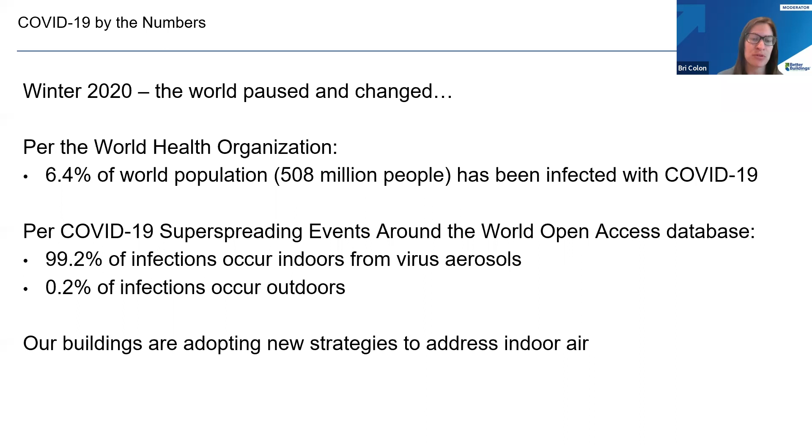Because of the changing landscape over the past couple of years and focus on indoor air quality, there have been a variety of initiatives catalyzed, as well as pieces of legislation. I wanted to share some information here to start that's connected to that.

First off, there has been a piece of legislation, the Bipartisan Infrastructure Law. There's a provision within that applies to the theme of today's webinar, focusing on energy improvement in public school facilities, honing in specifically on the K through 12 environment. It allows for new competitive grants for energy efficiency improvements and renewable energy improvements at public school facilities.

These could entail repairs and renovations that reduce energy costs or lead to improved teacher and student health and achieve energy savings. Eligible entities for these grants can consist of a consortia of one local education agency and one or more schools, nonprofits, for-profits, or community partners.

Applicants will be prioritized for schools with improvement funding needs, those with high free and reduced price lunch percentage, or those situated in rural locales. The funding will amount to $500 million, spread across 5 years at $100 million each. It's overall an interagency collaboration in enacting this provision.

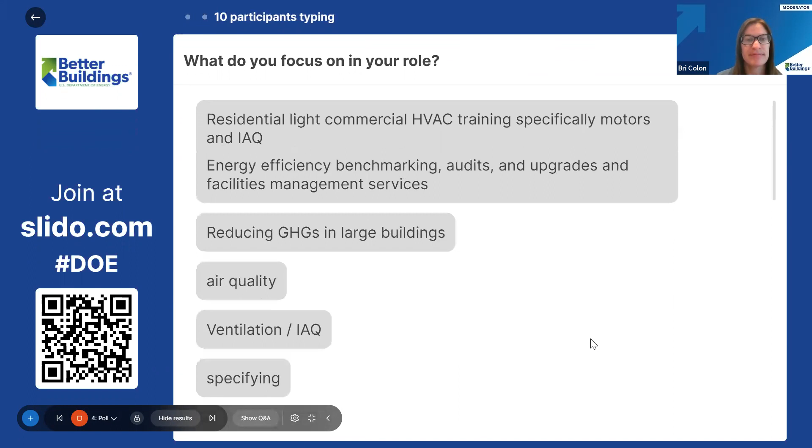And now we're curious where folks focus in their roles. Really the thought behind this question is, do you specialize in indoor air quality in this theme? Or are you working in facilities, but indoor air quality is just one aspect of that role? Where are your primary focuses coming in, and kind of where you see indoor air quality? Okay, seeing some items roll in here. Or are you a teacher and you're concerned about the health and well-being of students, faculty, and staff? I'm curious where those focuses are. Okay, we see some specializations on indoor air quality in communities, public buildings, energy efficiency at large. And for some folks, it's just one aspect of the role for designing and planning. Great. Health and well-being overall of students and staff. Perfect. Thank you so much for folks engaging in this. This is great to know this background information.

All right, feel free to continue entering in options. We have just a couple more questions, we can go to the next one. For folks who are affiliated with a school, this could be university, K through 12, or a district. If your school or district is planning or have completed any indoor air quality upgrades, we'd love to know a little bit more background and details about that. If you have completed those upgrades and are planning more, or other, or if currently folks are in the planning process for indoor air quality upgrades, as well as if folks haven't planned or completed yet any indoor air quality upgrades and they're here to learn some more information potentially before doing so.

Okay, I'm seeing a majority have completed some upgrades at this point and are planning for more. We'll let those roll in here a little longer. Feel free to continue entering in responses.

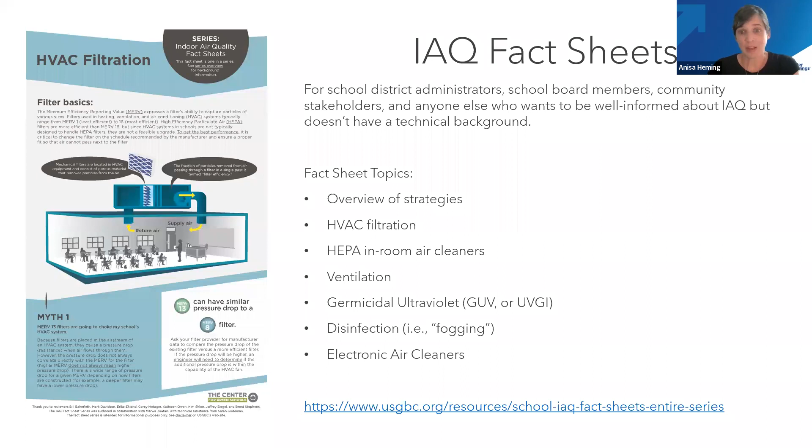So you can go to the next slide—I'll walk through the pieces and parts of these. They have a pretty consistent structure so you can understand what's there and use them if you'd like, and again, these are all free. This one is on ventilation. The first section is just the basics: what is mechanical versus natural ventilation, and what do we mean by ventilation.

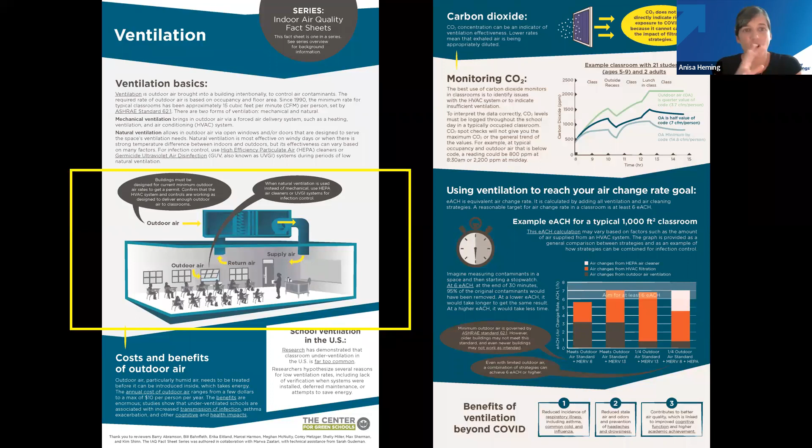The second section is a visual of how air moves through space. This is a consistent visual of a classroom on all the fact sheets that shows how the technology, whatever it is, actually works in the space. Then the next section is usually cost and benefits, or a more detailed look at the data and guidance out there about the technology.

On the second page, there's a section that goes one level into the technical information about how the technology works. For ventilation, we're talking about why measuring carbon dioxide only tells you part of the story related to indoor air quality, and what it can tell you—so monitoring CO2, what it reveals about what's happening in the air in the space you're in. That's one more level of detail for people really craving more about what's happening when we implement things like increased ventilation.

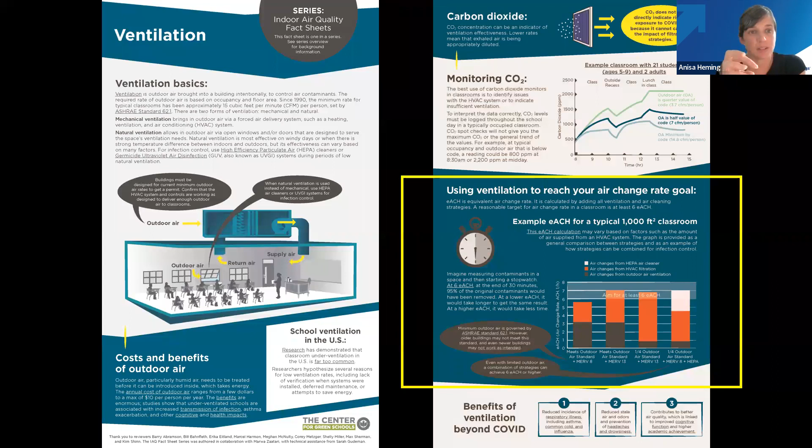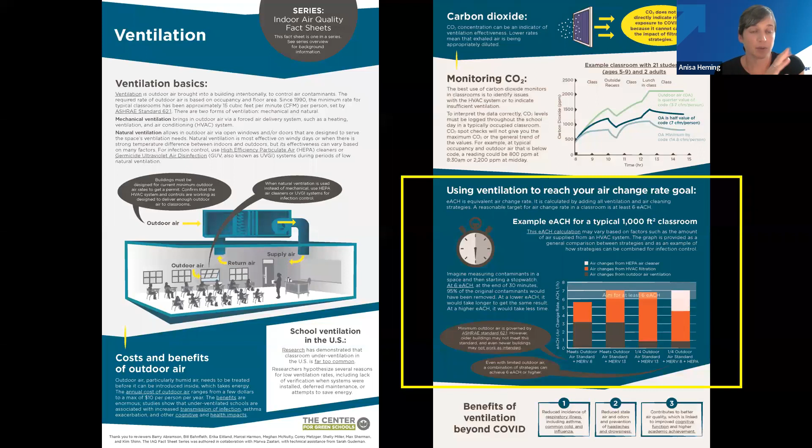The next section is about using the specific technology to achieve an equivalent air changes per hour, which includes the effects of air cleaning, ventilation, and bringing in outdoor air. We've put those together into a graph of different approaches to try to reach 6 equivalent air changes per hour, shown with a little stopwatch, to paint the picture of how to compare applying different technologies or combinations of technologies. The last section covers benefits beyond COVID.

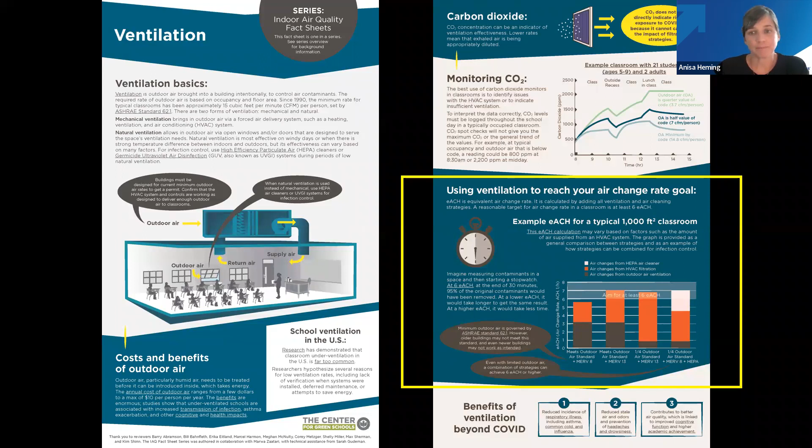Let me show you one more fact sheet—on the next slide is the one on in-room air cleaners, meaning mechanical filtration air cleaners, like standalone HEPA units. This walks through what those are, what their benefits are, and exactly what you're getting out of running some of those as a supplemental source for delivering clean air.

So that is one resource I wanted to make sure you had a really good view on. Let's go to the next slide.

I also wanted to tell you a little bit about, that's a resource to help people implement good strategies within classrooms. But we know a lot of resources are coming, and we know they need to be implemented.

So we wanted to take a look at whether they're being implemented across the country, and we implemented a survey for school systems. This is the second survey we've done. We did one last year and this year, so we can look at the differences between the two, to see how school districts have implemented air quality improvements during COVID. The next slide is this year's report.

The last one was last year's report, if you wanted to see that one. This is just to contribute to decision making, make sure lawmakers and others know what they can do to support schools implementing air quality improvements and what the gaps are.

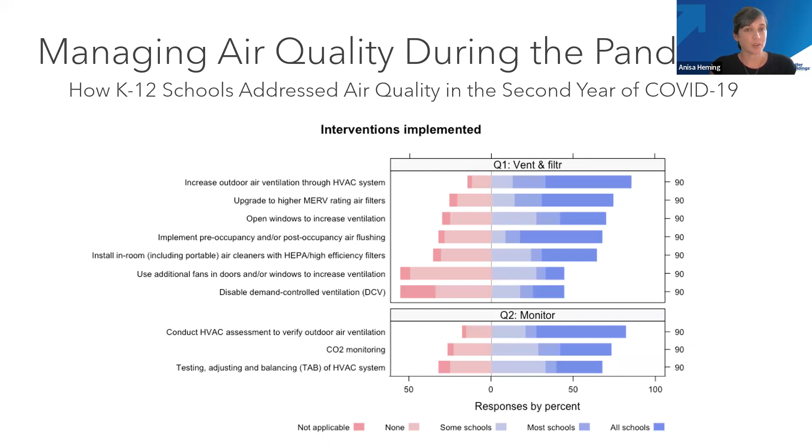The problem was, which I might have to skip through the challenges slides a little bit, that a lot of the buildings these school districts are dealing with are not able to implement the recommendations through those building systems because they either don't exist or they're too old to be implemented. So there's a real gap in the availability of appropriate infrastructure and the recommendations that school districts are getting from authorities about what they should be doing related to ventilation.

And I think Shannon's going to talk a little bit more about that challenge.

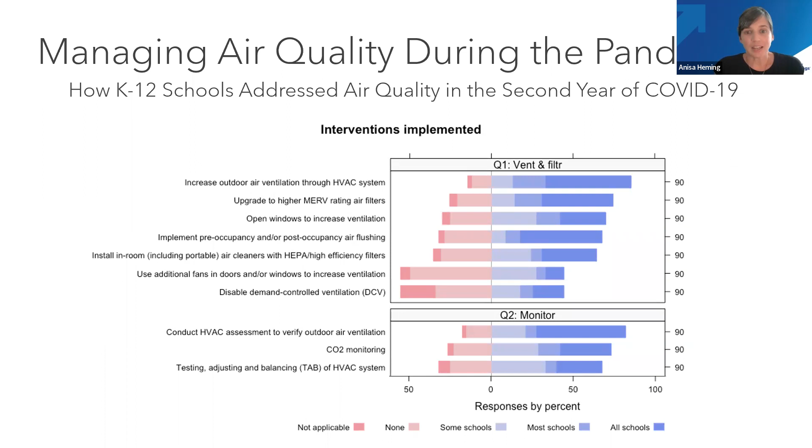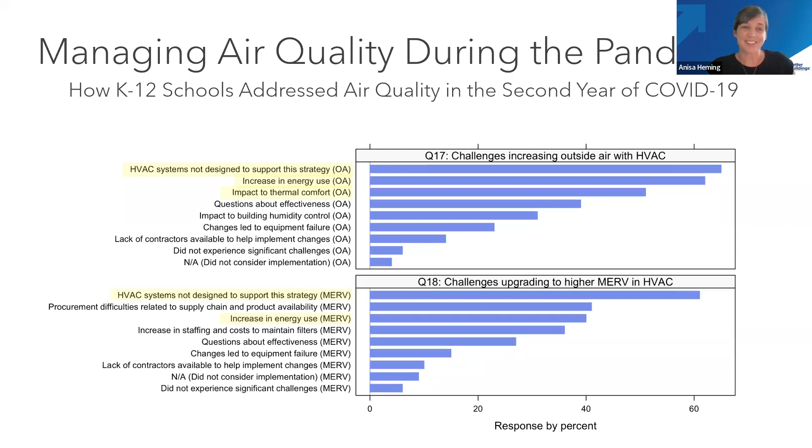So I'm actually, if you guys can you skip slides? We've got two slides. Okay, well, you can just do that too. You'll get these slides afterwards. You can also read the report. But this is the walkthrough of those challenges that I could elaborate on, but you can also read about in the report.

Go back one, and I'm just going to wrap up the report. So one of the things that we did see in the report was that there are a lot of school districts that are used to dealing with federal money.

They appear to be using the ESSER dollars to make indoor air quality improvements, including school districts that have a high percentage of free and reduced lunch students, and the larger districts. We think what's happening there is that they're used to dealing with federal funding a little bit more than some of the other school districts, especially on new programs, and they have a grant office that's used to dealing with this stuff.

And so we are doing some education and outreach to school districts to try to even out the playing field of which districts feel comfortable spending ESSER dollars on indoor air quality improvements.

And I think I'm going to wrap up there. I had an example here from Durham Public Schools of facility spending, but I'll let Shannon give the school district example here. Thank you so much for having me.

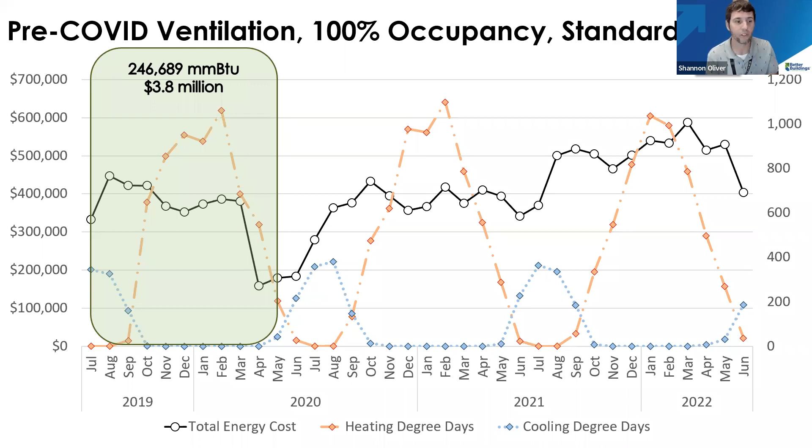But then if you go to the next slide, you can see this last school year, we were back to essentially 100% occupancy. We maintained that expanded set point and we still had the COVID ventilation. And we did spend about $1,400,000 more than the previous year. There was a jump up in energy use as well.

I should say probably about 400,000 of that amount is due just specifically to the gas prices that are through the roof, as many of you know. So it's an interesting consideration for us, as an energy manager.

Kind of historically, my approach has been, ensure thermal comfort first, and then make sure we're being energy efficient and saving money second. Really coming through the pandemic here, I've expanded that idea to think, obviously thermal comfort first still, because people tend to notice that pretty quick and you get hot and cold calls. But then, perhaps we could consider indoor air quality second. Is there a middle ground where we go up to maybe 4 to 5 air exchanges and bump out that set point a little bit to bring in that better air quality while maybe not having as strong of an impact on the budget as we could see here.

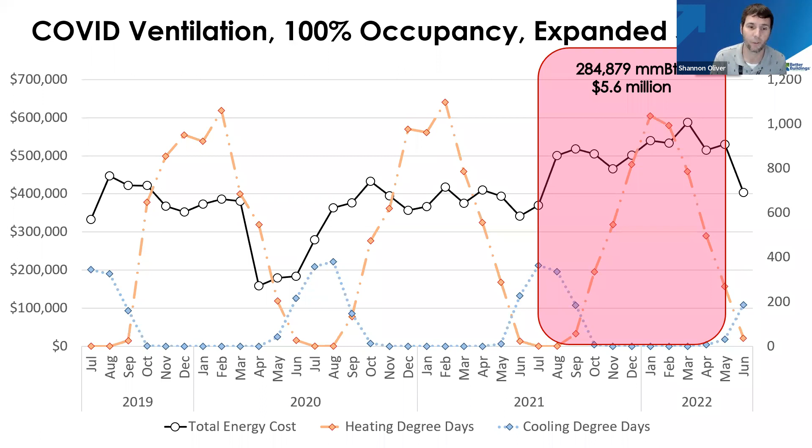So next slide. We did, as I mentioned, get a portable HEPA unit in every room. These were purchased during the pandemic. We spent $564,000 to buy them, and they came with one set of replacement filters. So we went ahead and actually bought a second set of replacement filters for another $162,000. All of that was funded through the CARES Act money. These provide essentially 1 extra air exchange per hour.

We initially installed them in the spring break of 2021. We purchased units that only required a once per calendar year filter replacement. So we were able to swap those filters out here in the spring break of 2022. We'll do that again in 2023. And really, the kind of take home message for me here is what's after that. We don't necessarily have a maintenance plan once that last year of replacement filters is up.

So initially I was hesitant to have these put in our buildings. I was concerned about the plug load impact and the energy use. And really that's been pretty minimal. We've had very good support from our custodial staff and teaching staff to make sure these are turned off when the room's not in use.

And they actually operate based on, I think, CO2 levels in the room. So if it does get left on, it will kind of pare down its operation if no one's in the room. So I think, hopefully we can keep these. I think that extra air exchange an hour is great. And ideally we can get some additional filters for the future. All right, next slide, please.

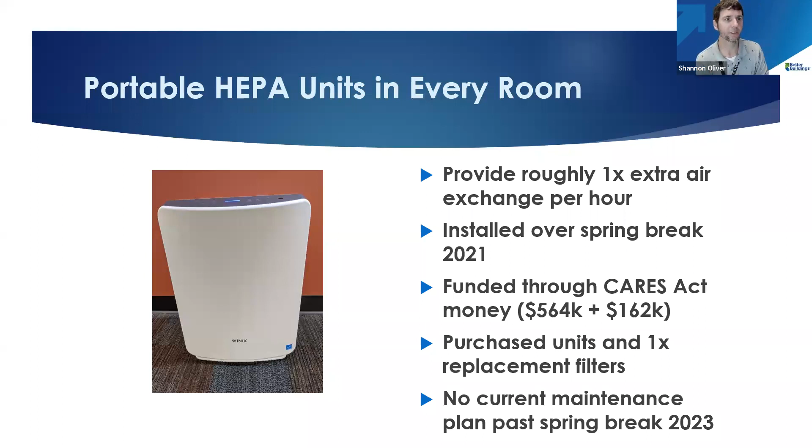So yeah, just to wrap up here a little bit on some of the research engagement we've been involved in. We worked with Colorado State University. This is actually about 3 years ago now, but they were working on an EPA-funded study to investigate the impact of a variety of indoor environmental quality metrics, such as thermal comfort, indoor air quality, energy efficiency, a number of things, and how those metrics affect student performance. Essentially, what we wanted to know is, if you do a building improvement that improves light quality or improves indoor air quality, does that translate to an improvement in student performance?

And there's been some interesting findings. There's a few articles being published from that study that do indicate a correlation between indoor environmental quality and student performance. So interesting stuff there.

And then throughout the pandemic, we've got a couple scientists from NIOSH, that's National Institute for Occupational Safety and Health, came in our buildings to investigate this HVAC programming to achieve the increased ventilation rate, and then what does that actually do to the air quality, right? There's sort of this assumption that if you make these programming changes to increase your air exchanges, then that should improve air quality. But we wanted to kind of verify that. They were very interested in watching CO2 decay rates and things like that.

And then most recently, we're working with University of Colorado on another EPA-funded study to investigate indoor air quality levels compared to ambient air quality conditions during regional fire and smoke events.

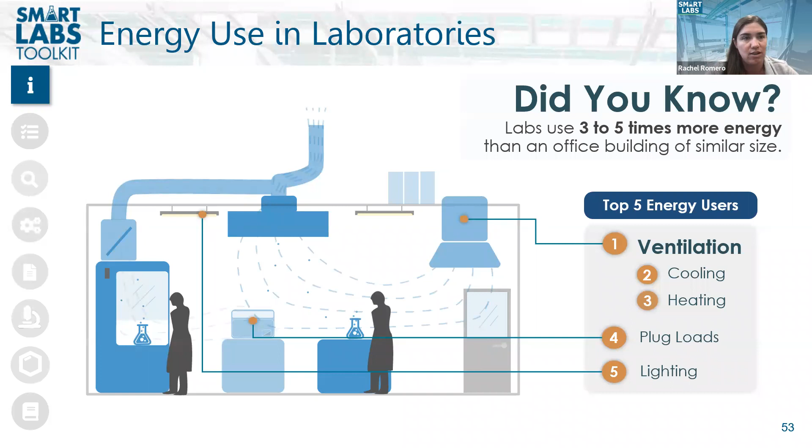Next slide. So when we're looking at a lab, here's kind of a typical lab layout. The first thing we're looking at is really that ventilation, which is why we're here to talk to you today. Under that, the top energy users with ventilation, we're including the heating and cooling as well, since that's all part of the same system. Then we see plug loads, so everything that's plugged in and being used as equipment, and then lighting in labs. This is why we're going to focus on ventilation, because it's a huge portion of what we're looking at in labs. Next slide.

So why is energy wasted in lab? Again, back to that ventilation, cooling, and heating. It's kind of an ingrained practice that when you increase that ventilation, you increase safety. But there have been several studies that showed that's not necessarily the case, and often that ventilation is not needed.

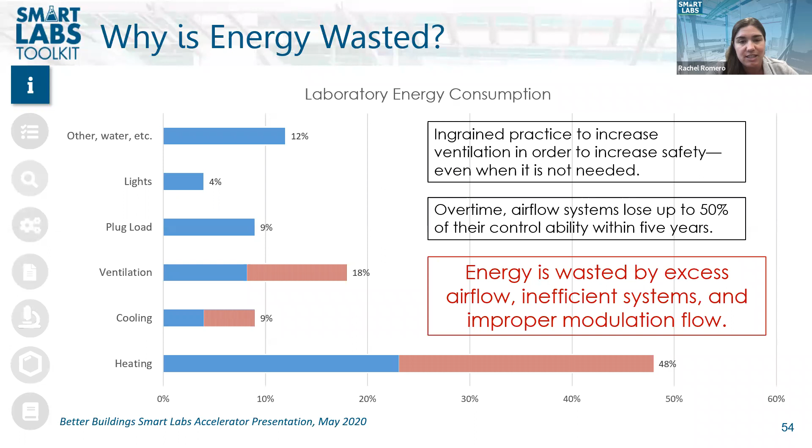You may have had a perfect system when you built your building a few years ago, but we see that airflow systems lose up to 50% of their control ability within 5 years. That's pretty consistent, so we have a lot of energy wasted due to too much air, inefficient systems, and improper modulation flow. All this could possibly reduce your air quality and affect safety in the lab, and that's why we're looking at this today.

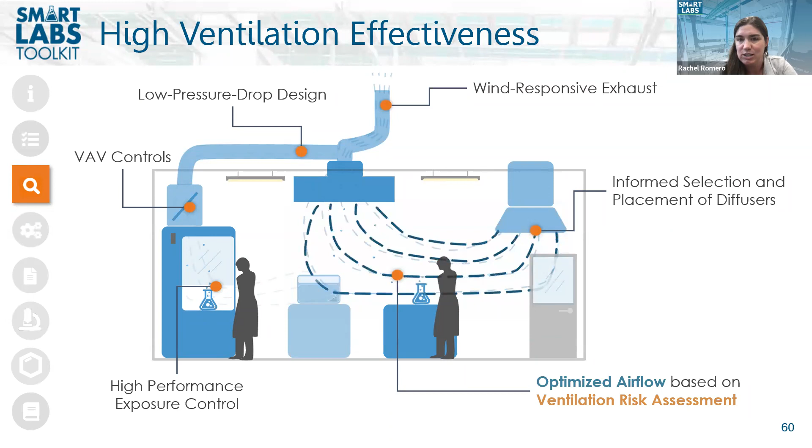So this is what makes up a very high performance lab, and that's what we're looking for. And so I'm now going to talk about the next slide.

Okay, so now we're going to have a quick poll. How do you determine the proper airflow rate for your lab? Just click over and look at it with you. We have a couple options here, and this could be, how do you determine the proper flow rate for your space? I saw somebody asking Shannon in the Q&A about this.

So laboratory ventilation risk assessment, set standard, which we're seeing a lot of, local code. Maybe it's an arbitrary number. Somebody said once upon a time, this is what it's going to be, and that's what it is. Mission critical space, we don't really touch that. Nobody talks about it, it just is what it is. The PI says don't touch it, it's what it is. There has to be somebody who maxed out their space and left it. We know that happened in a lot of spaces. Maybe there's an other option. All right, set standard.

Yes, it doesn't surprise me, we see that a lot. So thanks for participating in that. We will move on to the next slide.

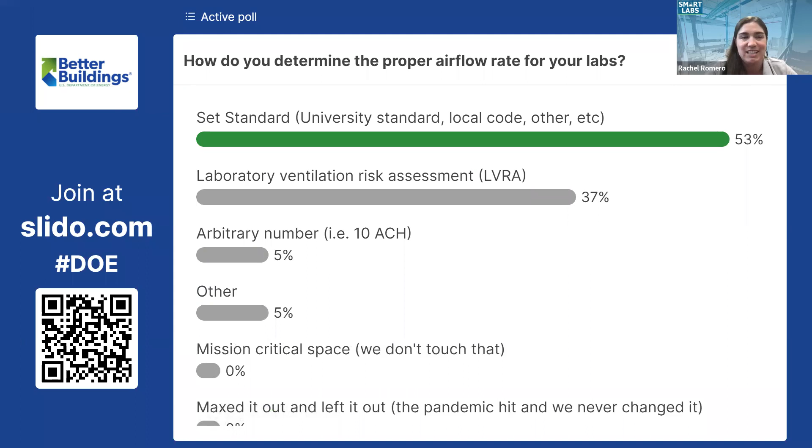So we're going to talk about the laboratory ventilation risk assessment. We have provided a tool to help organizations do the laboratory ventilation risk assessment, because this can be a very overwhelming process to the team when you first consider how to implement a Smart Labs program.

So the LVRA tool enables users to determine laboratory ventilation requirements based on the laboratory's overall risk and the items in the lab. It takes information collected from laboratory surveys, which consider the hazards and exposure control devices in your working environment. The tool then assigns a risk control band for each of these considerations, which has a scale going from negligible risk to extreme risk. The values are then aggregated to calculate the overall risk level for your laboratory, and that leads you to determine your ventilation off of the ASHRAE design level recommendations.

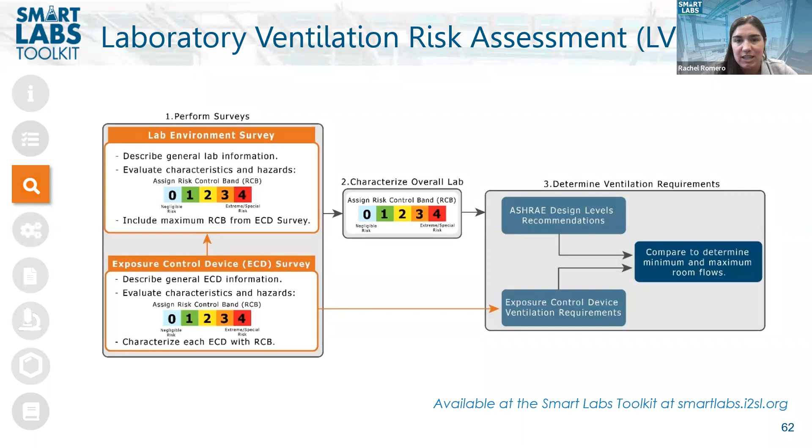And then it enables you to really set minimum and maximum room flows to help optimize ventilation strategies. So we're just going to give you, on the next slide, a quick demo.

We've taken a short screenshot of what the LVRA tool looks like when you download it from the Smart Labs Toolkit, which is where all of this information is collected and freely available. It comes in an Excel file, as you can see, and there are multiple columns and rows containing various information that users can populate to describe their laboratory.

So the tool assigns a risk control band for each response, which can then be used to determine the airflow rates. So it's pretty user-friendly, although there's a lot of information that goes into it to help you make good and accurate decisions for your organization.

Really, if you're looking at labs, this is a great way to look at your flow rates and ventilation, which can really affect your organization's overall energy consumption and decarbonization plans. Moving forward from that. All right.